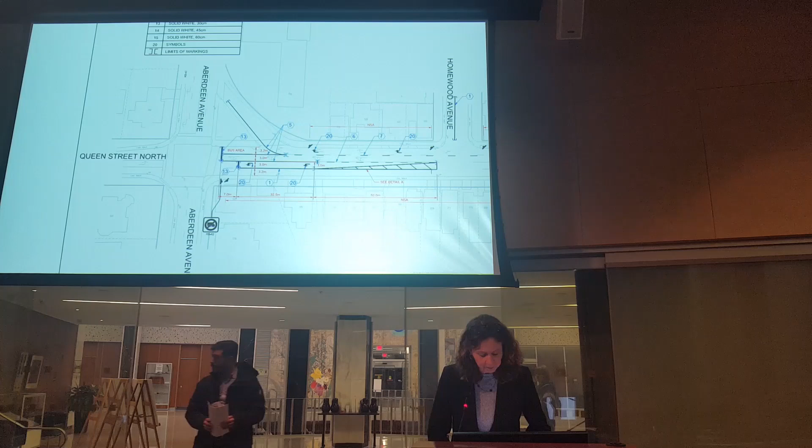Who are here. I'd like to go through an agenda or a roadmap. That roadmap will be me, first of all, introducing who is here tonight that will be assisting in support of this meeting. I'd like to give you a brief chronology of this project. We will speak also about the motion that council supported. So what are the parameters that staff have been given to work with, the work that they're charged with doing, and the budget within which they must do that.

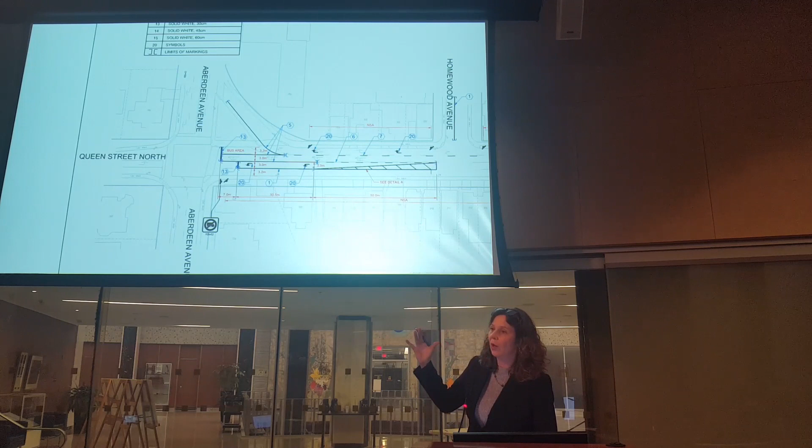I will underscore for you that this is a conversion project. It's not a reconstruction project. After that, staff are going to review the principles that guided this conversion project, and then we're going to go through it almost intersection by intersection. Personally speaking, it's a little bit challenging for me to understand a lot of these details, but what I do find very helpful is when I hear the comments of my neighbors who may know their intersection better than I do, and I can learn from that, and I hope we can learn together as we move forward into the evening.

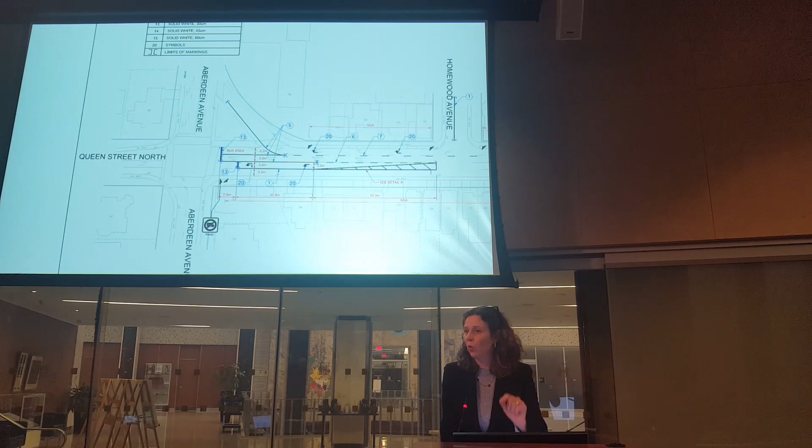When it comes time for you to give your feedback or to ask your question, I will be asking you to come to the mic, which is up there. That's where I will be seated after I give my remarks. Staff will be down here. The reason I'm asking you to come to the mic is so that everybody else can hear your question. We are recording this. You won't be on tape, but you're

from one-way to two-way traffic operations based on the report prepared by AECOM, to be funded for just over $1 million from the Red Light Camera Reserve. So they approved that conversion between Aberdeen and Main, and that staff from Public Works work with the LRT office with the objective of including the King to Main block in that conversion from one-way to two-way, and discuss it within the context of LRT moving forward. So that's what's on the table for us tonight.

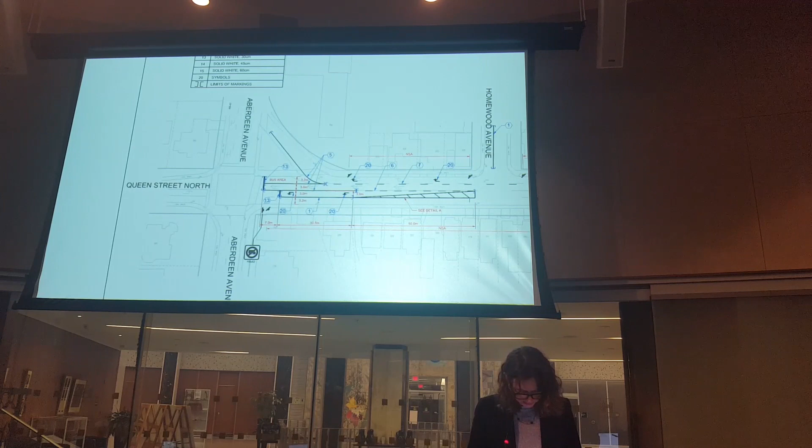What I'd like to do is hand it over to who is going to be the lead walking us through. This is Rob. He's going to be walking us through it. Is everybody okay with the agenda? Was that your expectation coming forward tonight? I have one question. Is it the time to ask? Sure. So my query is, why is this only to Main and not to King? I understand it's something with LRT.

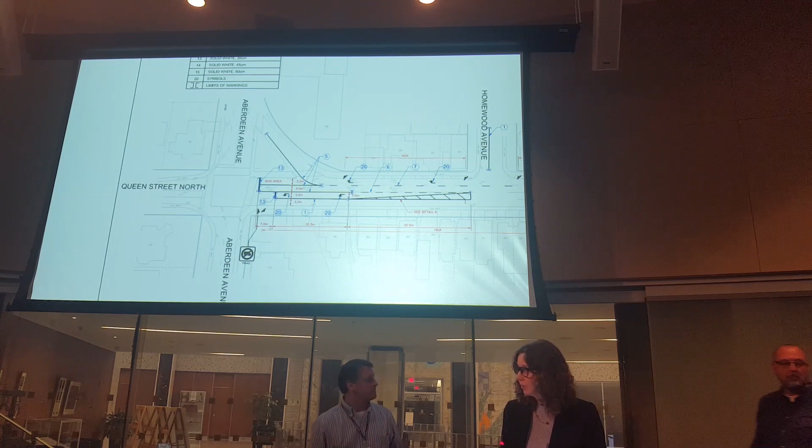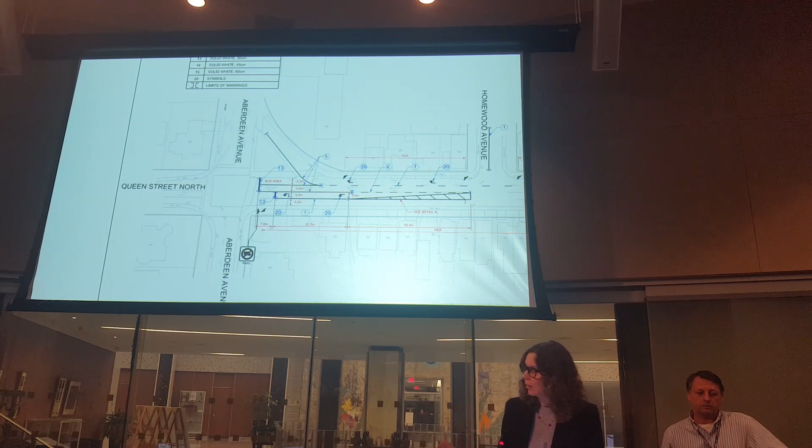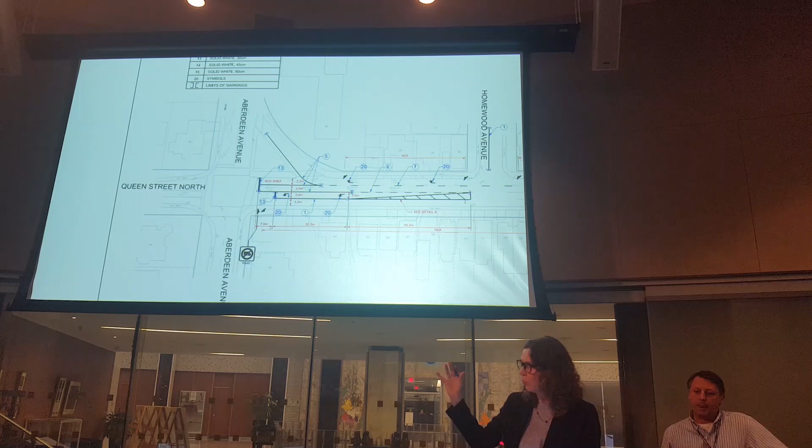Yep. My comment about that is a huge percentage of the traffic that turns left on Aberdeen is going to be taken away if you go to King. Very little will be taken away if you go to Main, unless it's two-way Main. That's a very good question. They're all good questions. In June, when council received the engineering report from AECOM and the feasibility, they had a number of options before them. One of them was, do we wait to do the conversion until LRT is complete? Or do we go up as far as Main, then have a greater sense of certainty with what's going on with LRT, and then move beyond that? Does that answer your question? So that's the decision that council made.

Okay, without taking too much time, my next question would be, is there a plan to make Main Street two-way? That's not on the agenda tonight. Is that right? Because I can't see it. Okay. Thanks. You're welcome.

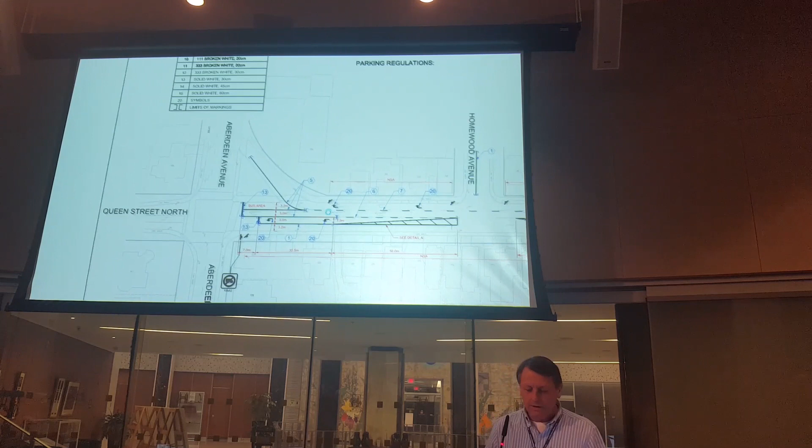What we have displayed up on the screen is what we call our pavement marking and signing plan. There's some information on this document, like these hexagon shapes. That's just a guide to indicate what type of line marking that is, so you don't really need to concern yourself about it. This design is probably about 90% complete, but it's certainly not a finished design. This is starting at Aberdeen and Queen, and north is to the right on the screen. What's shown here is basically what's already in place at Aberdeen and Queen. It shows a longer left turn lane distance here, but that may change.

So just slide it over. You'll see here up at Stanley, the design shows the center median where we have those knockdown sticks today. That'll be to enhance the no turns into that street. All along Queen Street, when we cross the side street, we're showing crosswalks with ladder bar markings all along. And some of the pavement marking design here will be modified slightly.

Okay, move over. So next up is Herkimer. Herkimer is the intersection which currently has three pedestrian crosswalks. There's an island out there. You want to highlight where that island is, Mike? So there's an island. It'll obviously have to be made smaller because we need to get a northbound lane through that area. So we've shown here in general where we think pedestrians will cross.

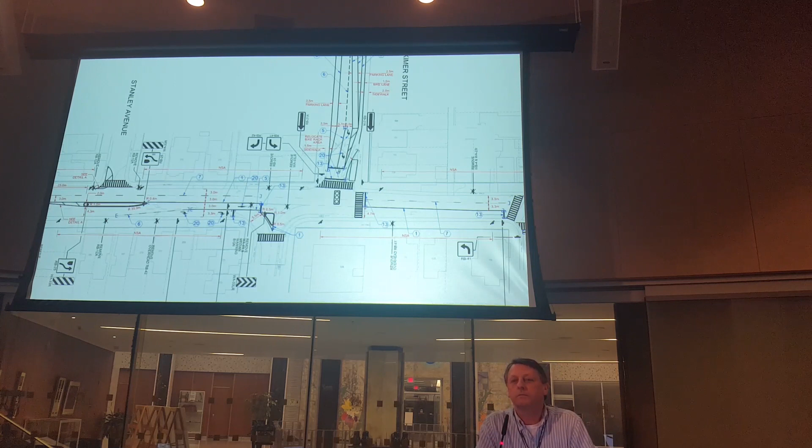I think what we'll do is we'll allow these questions for the people who are making their way up. It's also feedback, it doesn't have to be a question. I'm wondering though, if after these gentlemen speak, we'll let Rod go through everything. We'll hold our comments, and then if we want to go back to something, let's do that.

Just in your deliberations about how to handle that intersection, did you include the option of having all 4 pedestrian crossings operate at the same time?

No, we haven't considered that. That's what you call a pedestrian scramble phase, and inherently there's a problem with those. Because you can allow pedestrians to cross all at the same time, but when the green comes on for the vehicles, will you allow pedestrians to cross with the vehicles?

So, just for everybody in the room, comments like that, we will take those comments back, we'll evaluate it and determine what happens from a level of service standpoint and from a safety standpoint, and then we'll discuss that with the councillor to let her know what our findings are. So throughout this entire design, we did meet with some people earlier today, and they had similar type comments that we've taken and we're going to take back and review. So if you do have comments like that, please do bring them forward so that we can evaluate them.

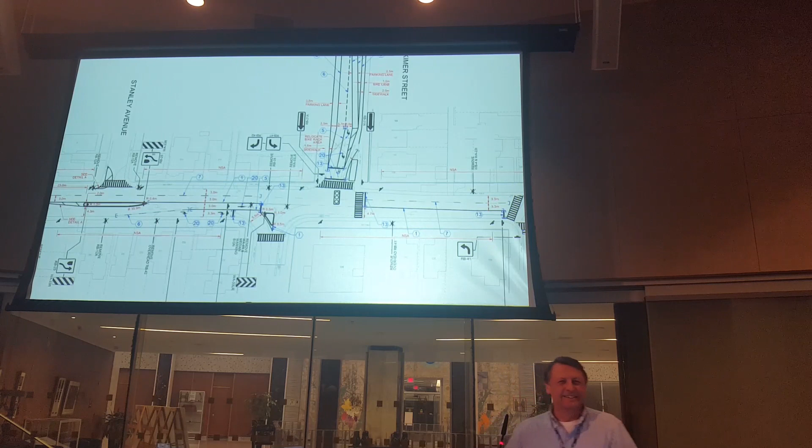I think we're going to allow one more question at this point. I have to attend another meeting soon, so I would like to ask a general question. What is the purpose of this change in traffic direction? Is it just to accommodate the LRT? I can answer that question. Speaking of the mic, thank you. The purpose of the conversion was when the work began in 2012, 2013. The community wanted a conversion as one way in which to bring some measure of control over the traffic, so slowing down the traffic. Because when you have two antagonistic forces going at you, it's one way in which.

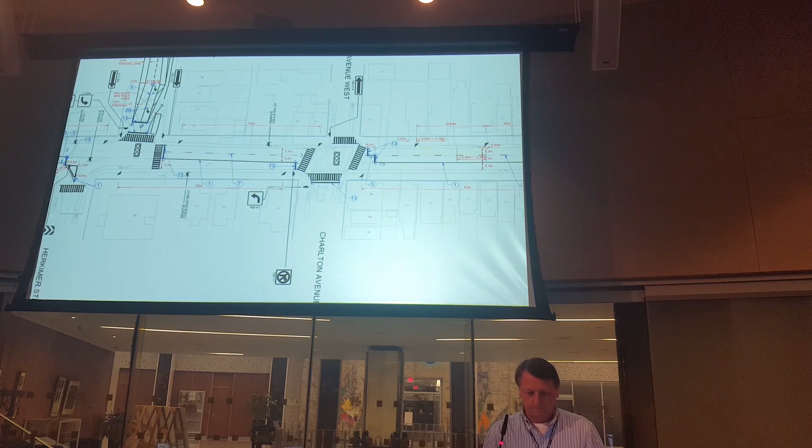Okay, so we'll move down. Next intersection up is Charlton. Really not too much change there. We saw some of the crosswalks being redesigned a bit to suit a little better design. And we've had some comments earlier today that will mean some more potential changes here. But going up again at Robinson, not much change. The same on both sides.

One thing to note here in yellow, does that show up in yellow? We're just showing the potential parking opportunities on Queen Street, because with us going to a one-way northbound lane, we're going to have to remove all the parking on the east side of Queen Street. We estimate there's about 51 parking opportunities on the east side of Queen Street. When we go to the west side, we're not going to be able to provide quite that many spaces. When you look at this particular block, you can see it's a long block with no driveways, whereas on the other side of the road, there's several houses. We can't block the driveways, so we end up losing spaces. So we estimate about 36 spaces can be provided on Queen Street between basically Charlton and Main Street.

Duke, which is where we have the intersection pedestrian signal or half signal, will become a fully signalized intersection, like the other intersections along Queen. We get up to Bold, not much changes here. Same at Hunter. It'll obviously have a northbound lane. The one thing we have identified is this right turn movement here, because of this really tight radius in the corner, and there's a big hydro pole right in the corner there. We're going to prohibit right turns there, because they just won't be able to get around that corner without encroaching into the other lanes or riding up over the curb. Then there's Canada Street, Jackson. Again, there's not much change there. And obviously, right now, because it's ending at Main.

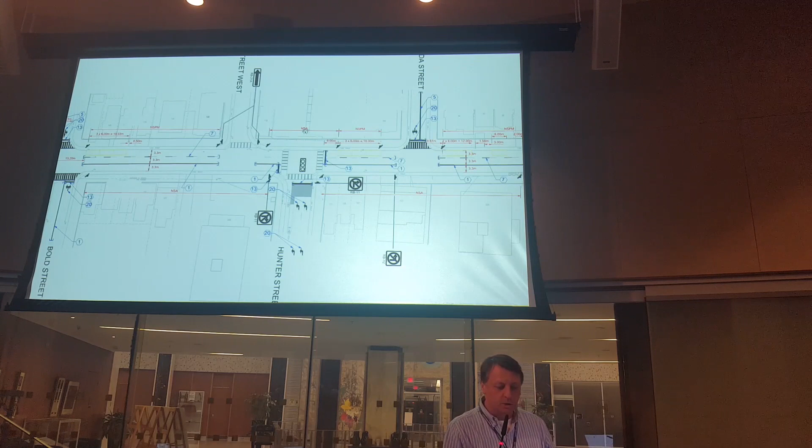Whether it's one way or two way, what are you going to do to address that issue? Like I said, our scope of work was purely more of a pavement marking and signing issue. But I know the bump you're talking about, I think it's really the top of the railway tunnel. Yes, it is. And they've worked on it a number of times and we have the same issue. Yeah, that would be something we'd have to maybe refer to another group to take a look at. But if you go to two ways, you're gonna have that many more cars exposed to that. Yeah, and the cars coming from different directions. I don't know what that's gonna be.

I just have a question in regards to the last question I had. You said it being one way now makes it dangerous. Do you know how many accidents have been on that stretch of the road in the last year or last 5 years? On this particular stretch by Hunter, the whole stretch? The whole stretch, I couldn't tell you. We have that information, I just don't have it with me today.

Well, I think that's an important issue because I don't know off the top of my head. $1 million. I don't know if it's in the study or not, the reports. I don't think so. We'll take a note. I mean, is there that much money in the city that would waste $1 million to change literally a few blocks if there are no accidents?

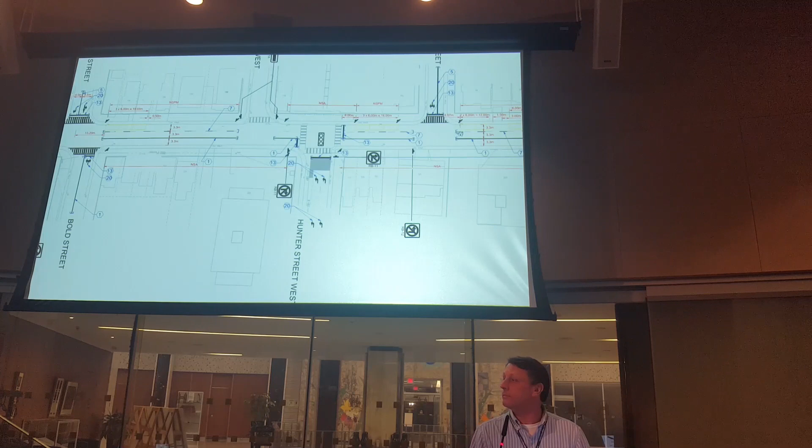Okay, we're talking about tonight, the parameters that are on the table and the direction that's been given by council and the money that has been assigned to this, is that there is a conversion forthcoming. So just to finish off, here at Main Street, the curb lane coming northbound is going to become a right turn only lane onto Main, and the opposing lane coming down Queen from King will become a left turn only lane onto Main. It doesn't show in this drawing, but we're considering prohibiting right turns on red here. And we're going to have ladder bars in the last two crossings here. That's basically what we designed. As you see, we haven't shown any design work up to King here.

The other thing to point out is we plan to allow parking on the west side of Queen all day except 4 to 6 p.m. Monday to Friday, which is when we're going to need a little more capacity for the southbound traffic. Outside of those periods, you can park there.

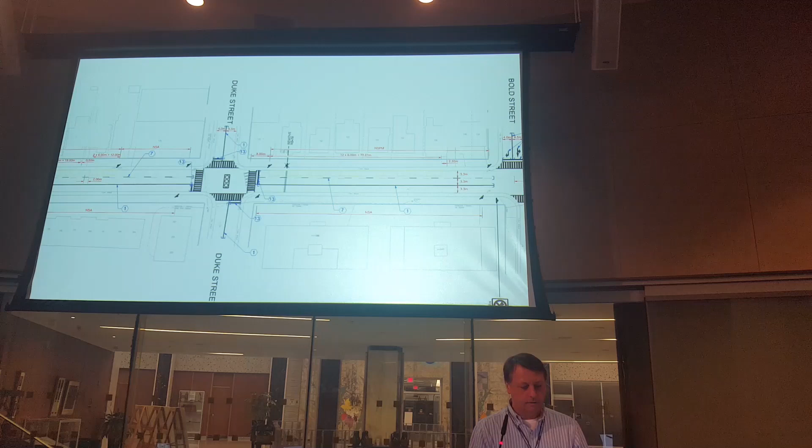Did you highlight the island at Stanley? Yeah, we put it in. That'll be a raised concrete island to replace the bollards. So there is a restriction on Stanley at present. That restriction is going to remain and it's going to become a permanent concrete one. Is that what you're saying, Rob? Right, we show the sign being removed, but we may leave the sign in there, but the island would certainly prohibit that movement, or make it much more difficult. That will become a permanent feature. No left turns on Stanley.

Thank you so much. That is a lot to digest, and the features are quite detailed. But again, we can often learn from the comments and feedback from our neighbors. So if anyone has feedback to offer and questions, now is your opportunity, and I will be listening and taking good notes.

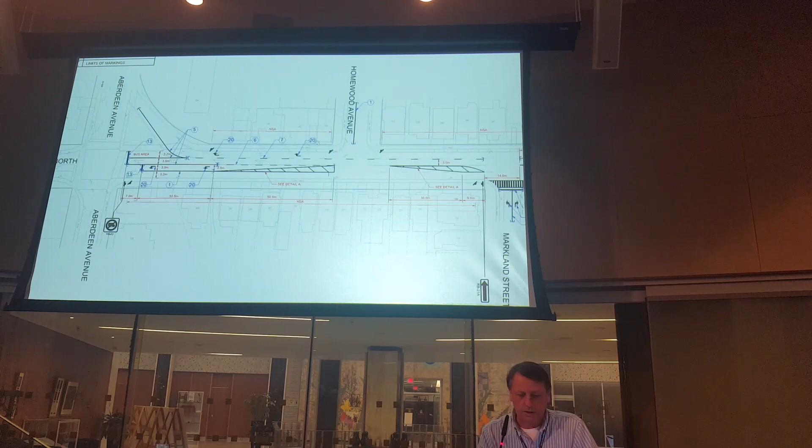Take me back to Homewood. So a person who lives on Homewood and wants to head east, how are they going to cross Queen Street? I'm not a traffic expert, but I would think a pedestrian would want to take the shortest route to get to their destination. So if I live on Homewood, how am I going to go east? You're talking as a pedestrian? Yes. How am I going to head east to James Street? The way we would look at it is either you go down to Aberdeen or you have to go to here to cross.

Versus now they go here to cross, or they go down to Aberdeen to cross. It just seems to me that the distance is so far from Homewood that a person would have to go to Herkimer when they can go through Markland. There's going to be a lot of jaywalking, and at nighttime there's going to be a higher incidence of people being hit.

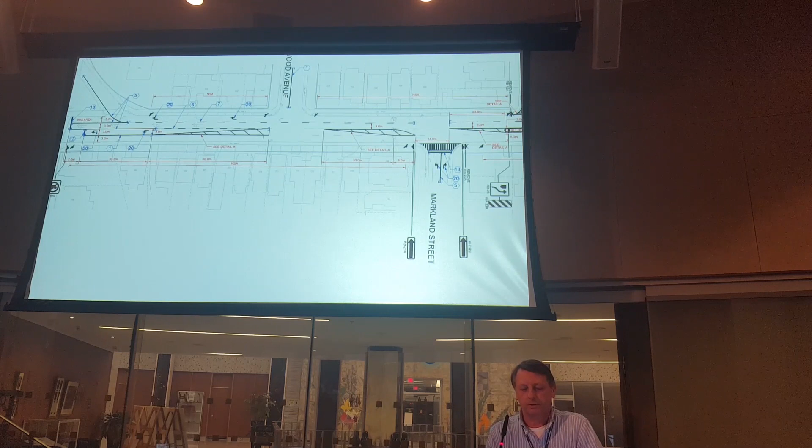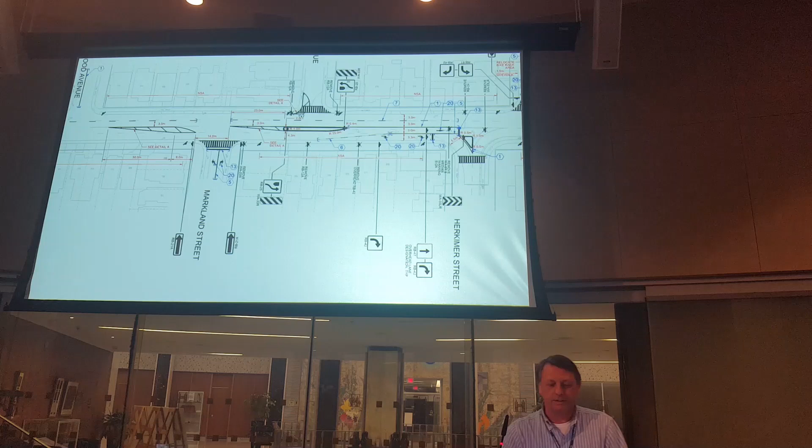Well, we can take a look at that. One of the issues we always deal with is when you start putting devices too close together on the roadway, it starts to be difficult. The drivers get distracted. There might be someone crossing here, but they're looking at the signal displays up here. Generally speaking, we like to keep about 200 meters between devices. I know that's not possible here and still have a lot of spacing, but we can look at it.

But that's our concerns. And the parking in that area for Homewood, Aberdeen, there is currently some parking on the east side of Queen Street. So when you put up that barrier, are you taking away all the parking? Yeah, that is one change that will happen. How much parking is there, right? I think right now it's all gone, isn't it?

No, I think there's some. Is it between Aberdeen and Markland? I think it's somewhere around here, right? Yes, they park all along there at night. And it ends before Markland. At most it was like 4 spots, I think. There's a sign there, but it doesn't say what the sign is about. So those people are going to park on Homewood, which is already over congested.

Well, what we're trying to do is, if traffic is in this lane, that they stay in this lane, that they don't veer back to this lane. Because one problem you will have, let's say you allow parking here, but there's nobody parked there. So the first guy in line follows this path, and then he tries cutting back in, and some guy comes up beside him because he sees there's no cars parked, and they can sideswipe.

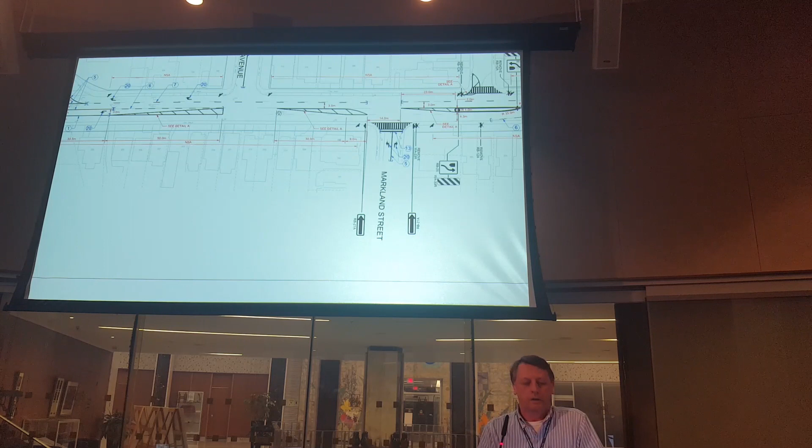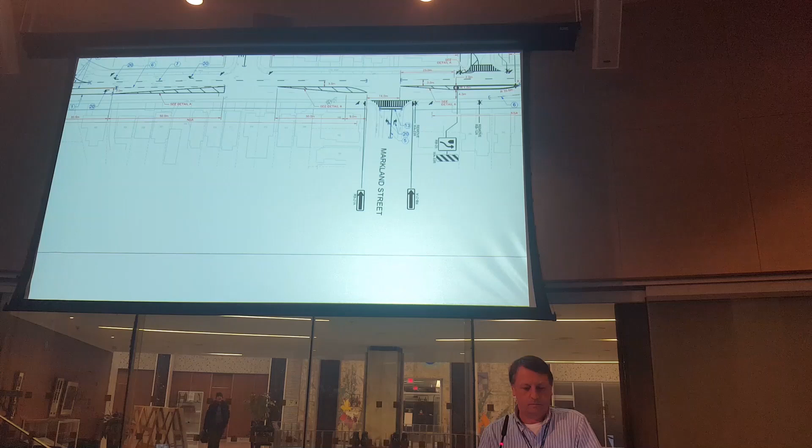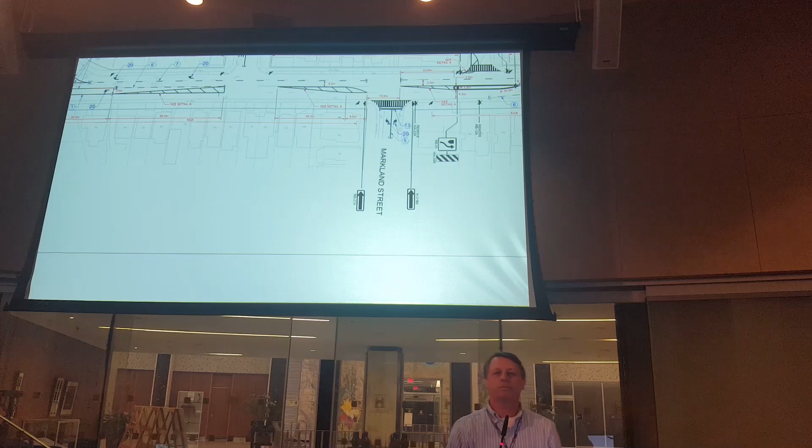But like I said, the cars come through, they're gonna swing out, and then swing back in. And if there's no cars parked in the curb lane, you may have people deciding to pass the guy in front of them, and you end up creating a pinch point on the far side. But you created that problem by putting those bars there. If they didn't exist, the cars would stay in the left lane. One of the requirements of what we're doing was to put this island in. So there's not enough room here for 2 lanes, so at some point we have to close this lane off.

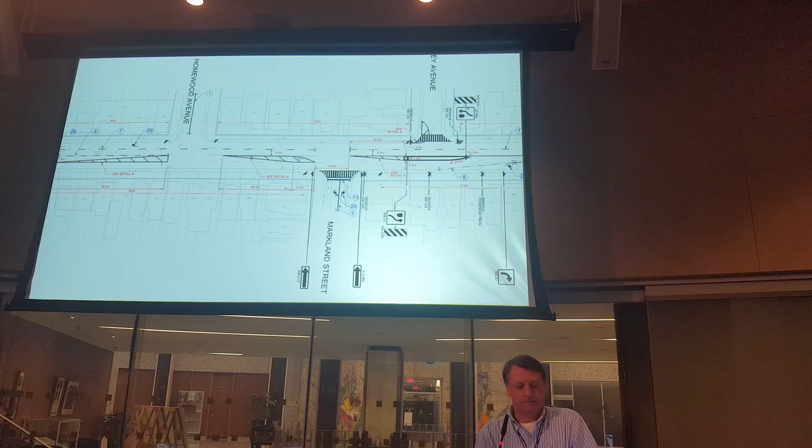Do you want me to bring this up? Oh, no, I understand what you're saying. Yes, you take this out, put the barrier on the right side so the cars stay all the way straight to the left until they get to Herkimer and just turn in. You could have one straight line and you don't have any of those barriers, and still let us park on the right side.

Let us take a look at it. Your concern is that if they don't park here, they're gonna park over here. Yeah. We can take a look. Some thoughts just crossed my mind as we're sitting here, so let us take a look at it. I think we might be able to do something there, I got an idea here.

But my concern is that there are a lot of apartments there, and the one apartment on the corner of, I think, Duke and Queen, has a lot of visitors from the fire department, the police department, a lot of flashing lights going on, and it comes into my place.

I'm concerned, or maybe I just don't understand, what's going to happen in that lane in front of those apartment buildings. Presently, in the evenings, a lot of things seem to go on, people's health, they're ill or whatever, and it's an abnormal amount of vehicles for fire department and ambulances from my perspective. Is that lane going to stay there for parking? Or what's happening there? I didn't look at it.

Typically, we restrict parking near a traffic signal, but we have flexibility as to how far we restrict it back. We just don't want cars parked so close that they obscure the vision of pedestrians at the intersection. And as far as the light changing, when we signalize this completely, it'll operate much like it does today. It's going to be a push button across the road. It's 3 lanes, they probably get about 20 seconds. But the southbound display will be on the other side of the intersection.

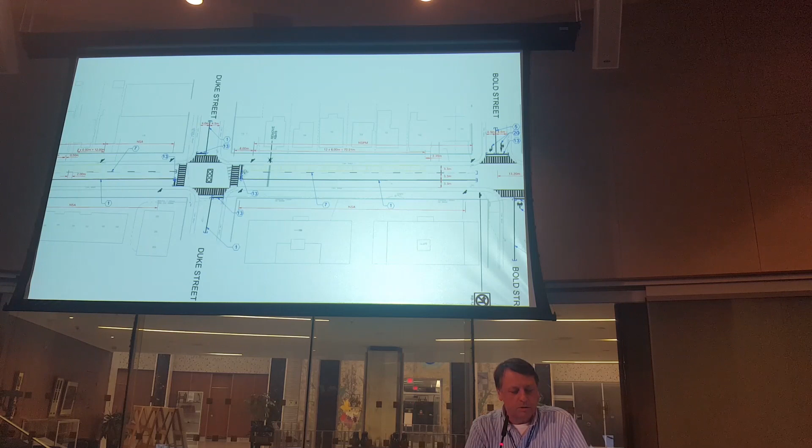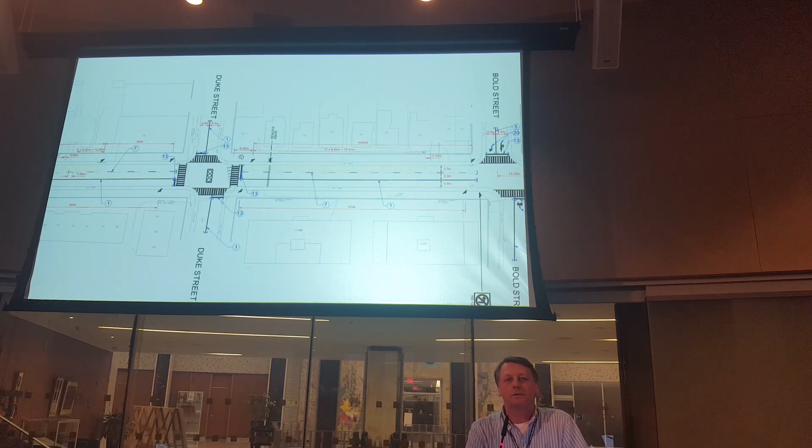Actually, just in general, if you drive around the city, most of our traffic signals are one-way streets, they cycle all the time. You don't need a button to cross. But this is now going to 2-way, and it's not normal that we cycle like that on a 2-way street without demand.

You've taken away our ability to turn right on Queen, jog onto Stanley, even though our entire lives, school, church, karate, everything's on Locke or Dundurn. So you forced us onto Aberdeen, but can you please picture coming out of Markland and turning left onto Queen? Just envision that. You're creeping to the end, you've got your left signal, you can't see because there's trees, there's cars, there's snow, and there's signs. And now everybody rocketing down the mountain at 60 or 70 kilometers an hour heading north is suddenly swooping into the lane that you're edging out into to see.

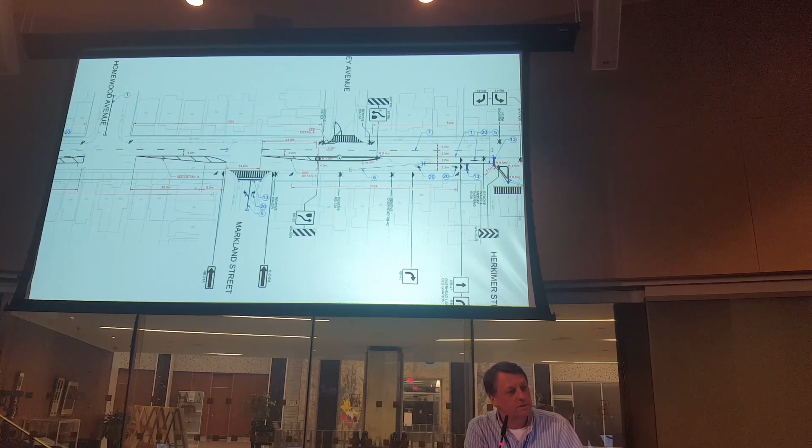I think Dave's got some comment. So with this design, one of the things it does is if you're turning left off of Markland, now you only have essentially one lane of traffic to identify. So you're watching traffic coming down from Aberdeen, you're going to pay attention to the traffic in the curb lane. Which you can't really see until your nose is out, based on the trees and the design of the street. Okay, so the trees, that's something we can look at. Is there something we can do with that? The speed of the cars is another issue.

So, if I can just finish, once you've identified that you have a safe gap to make your move, because of this design, you almost have, we'll call it, a no man's land there. And you're able to sit out and now focus on traffic coming southbound on Queen Street to make sure you have that safe gap to enter the roadway. Whereas now, I know what you're saying, you have to navigate both directions, trying to find that safe gap. So this design will help you with that.

I mean, don't get me wrong, we appreciate the work being done. The crossing, we've been there for 4 years. I've lived in Toronto, Montreal, Boston, Vancouver. I think, Cameron, what do you think on average, the number of cars that goes through the pedestrian crossing?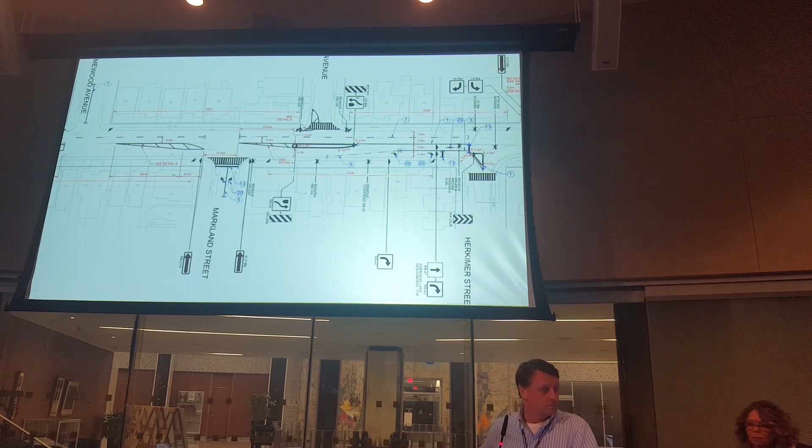Well, but if I could just jump in here. This is the intricacies of city building. Because you've remarked there are children on Markland Street. There's also children on Stanley Street. And the reason that protection was put up is it was deemed to be a safety hazard. So the cars coming the wrong way. I think, yes, that's right.

And I think what Mr. Ferguson was suggesting maybe is looking at Markland. Again, our scope is Queen, but looking at Markland and maybe considering an opportunity to add a bump out, which would prohibit or make it more difficult for cars to think they can opt for Markland. So we've heard your concern, and Ms. Jones

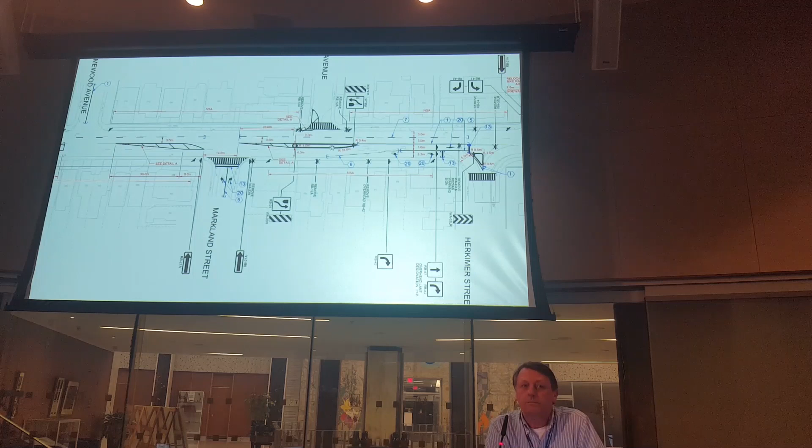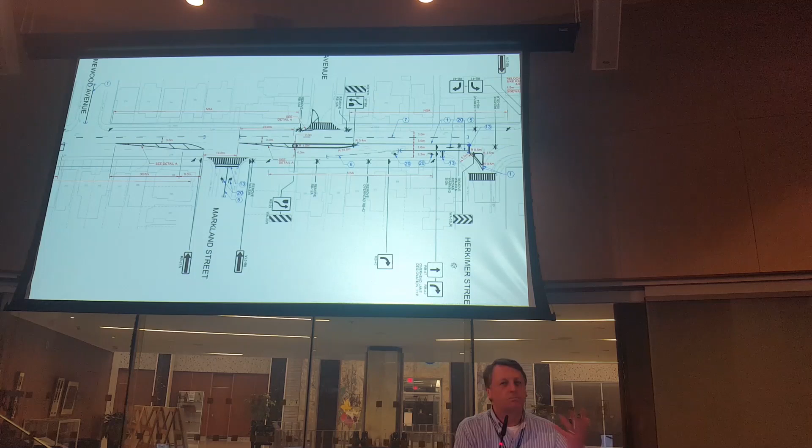One comment I can make about the island going in, with that island being placed there, that's gonna narrow the roadway. It gives the appearance of a narrow roadway for drivers. So it should have some effect on reducing people's speeds there. They're gonna have a curb right next to the road. Generally, if you drive through anything where it looks like it's narrow, you're gonna slow down. So that will have some effect in reducing maybe the speeds coming through that area, because that island will be there. Whereas now it's just sticks. I don't know if you can see it. So, but yeah.

Hello. Thank you very much for allowing me to actually say something. First time in an event such as this, so bear with me, please.

So as I understand, the pedestrian crossover now will not be there? That's right. Okay, and as far as, we can't look at Queen Street in a bubble, we also have to look at the tributaries on and off it, which people have raised here. For Bold Street, I see you have two lanes coming onto Queen Street from the west side.

Realistically, I'm not sure they'll fit. Obviously, you've done the measurements, but I'm just thinking of the parking that's already there that we're pretty close to the Bold. You're talking about either putting in no parking; I'd rather no parking and no stopping. That could be confusing to some drivers, since it'll be a stop. Yeah, some of these side street markings, it's shown like this, but it's designed on 100%.

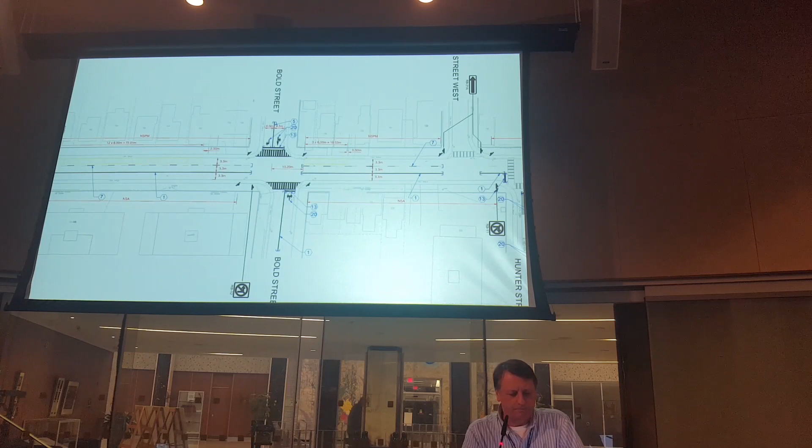I don't think you have markings like this today, do you? No. It's just a stop bar probably, and just no lanes, if it's even there. Yeah. We may just leave it that way. I mean, for a lot of these little side streets, I don't know if you really need to designate the lane so much like that.

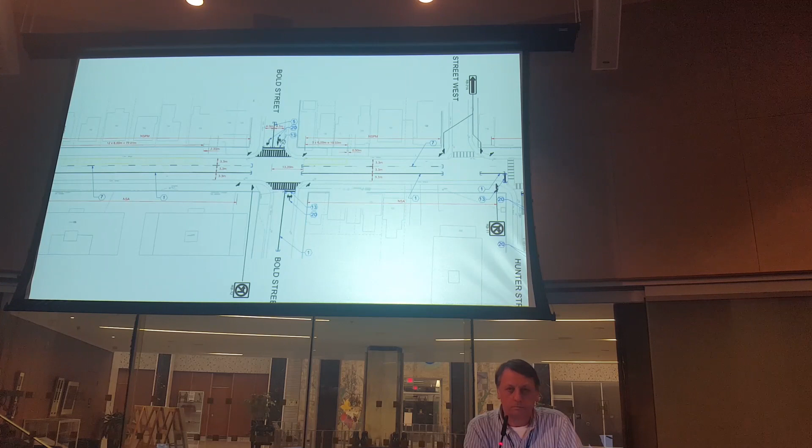Yeah, I'm just thinking, especially if you go that type of route where you're looking at people turning both ways simultaneously. Unfortunately, the streets aren't necessarily designed even for some of the two-way traffic that we have. That's a whole other issue, but now putting that in might make it a little more. Yeah, we would take a look at that, but I don't see that being a critical component of this.

So, currently there isn't any parking on the west side of Queen Street, and we mentioned it, but you kind of addressed that too. Correct. So I thought you would mention something about removing some of those spots. Yeah, because we're going to convert the east side curb lane over here to northbound, we can't allow parking there. So the residents who are going to lose some of this parking asked us to look at whether we could provide some parking at least on the west side to make up for what they're losing on the east side.

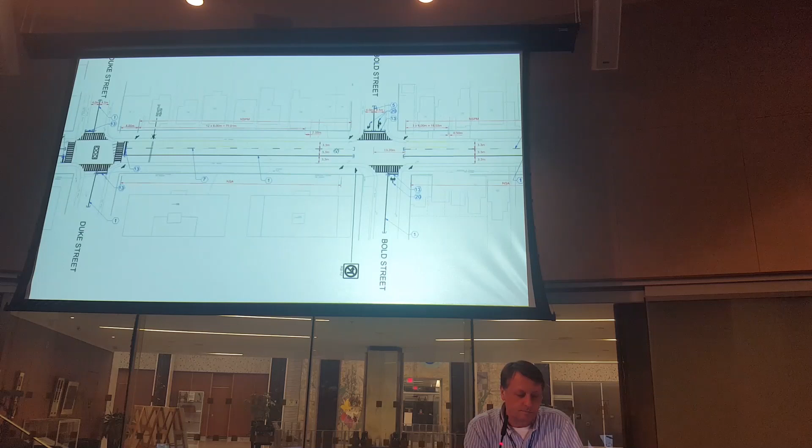And just to reiterate what some of the other people have said, it is a main route, especially for ambulances going to St. Joe's. I would just hate for it to be problematic for them in how this works. So hopefully, I'm sure you're accounting for that. Someone's already addressed turning on Stanley, so I won't talk about that then.

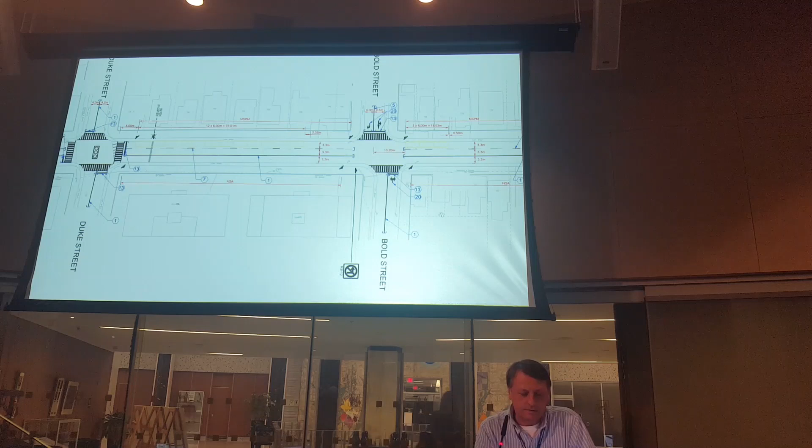So the light for east-west traffic, do you envision it being similar to what it is today? There's a stop sign there presently. Yeah, the stop sign today would be a regular traffic signal. But you were saying that the traffic signal was going to be pedestrian activated? And vehicle activated, so if there's a car waiting, it triggers a light. But it's not going to be any longer duration than what it is today, because there really isn't that much traffic going across.

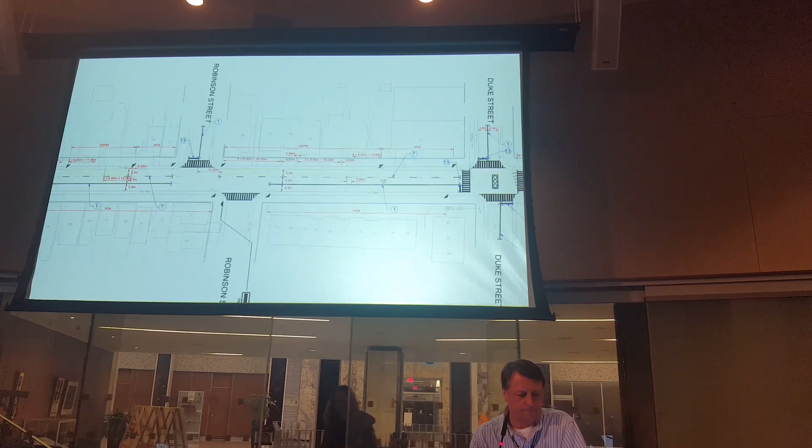And sorry to bring it back. We want to go north? Yeah. So I'm trying to understand, you said you would make the little median there where it turns at Herkimer. The median that's in there now for allowing people to turn right, to stop them basically from continuing northbound. You said you just want to make it smaller. Why is that? We've been asked about how this signal is going to be phased, and one reason is we're concerned if we remove the median. If you drive this on a regular basis, you'll know once you turn and get over to Hess, you need to get into the other lane to go straight through because it turns into a left turn only lane at Hess.

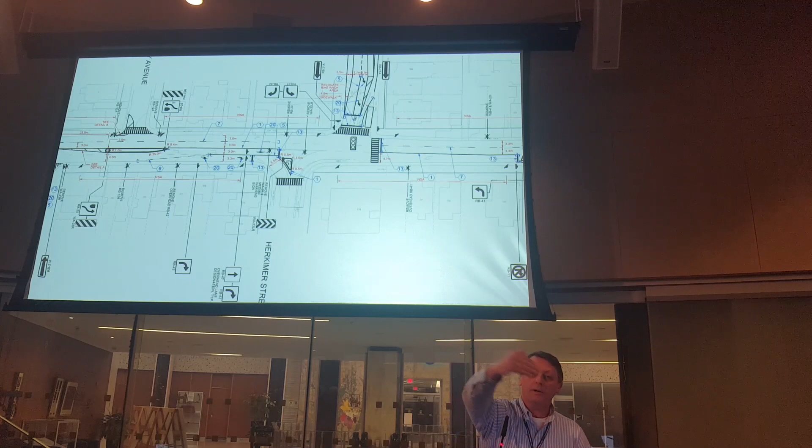So the expectation is anybody coming south on Queen is ideally going to want to get into this curb lane. They're going to turn here and then swing over to Hess. This island would provide a splitter between the heavy northbound rights and the southbound lefts. Because we feel if the island's not there, people are going to make a wide right turn, and they'll conflict with those right turns coming north. So it's encouraging people not to make a wide turn, that they have to turn into their lane as per the Highway Traffic Act, and then switch over.

And then the reason for the island there, we want to put a signal pole on it. And so that'd be the regular traffic signal you're talking about, or would that be something separate? The way we're looking at phasing this is that these pedestrians crossing, they'll probably cross more up here. Yeah. That crosswalk could be put up here.

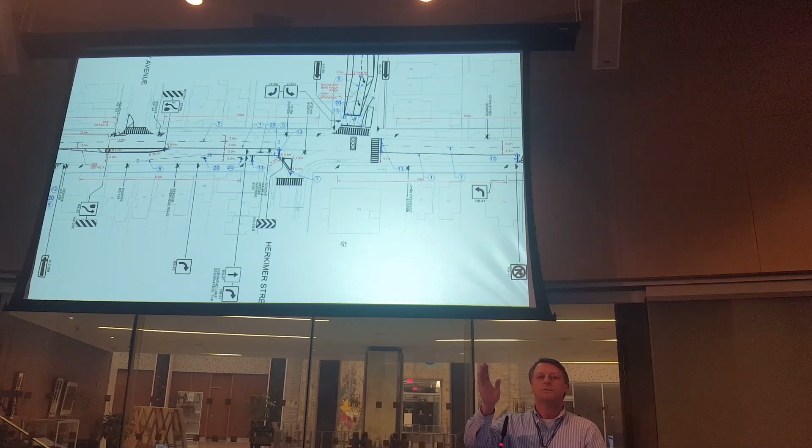But based on comments we've received so far, we're probably going to phase it so that the right turns and pedestrians do not move at the same time. So it'll be a signal that says right turn signal. So it'd be red when the pedestrians cross here, and the green arrow will come up for the right turn. So we completely separate it, so you're not getting rights crossing when pedestrians are going.

By having that island there, it's a great place for us to put a pole to put the signal head display right in front of the driver. So it serves a couple purposes. If you were to remove that, that might reduce a lot of the issues that other people were talking about, and you were just talking about people now trying to get in one lane, moving around. The other thing it would do, it would enhance the fact that if you're in the curb lane, you have to turn right. If we move it, someone just might decide he wants to go straight through.

Of course, but you can't account for stupidity, right? Yeah, we try our best, but we can't.

And I guess just as one final comment, it just seems to be a growing sense within the city, and not just with Queen Street and other issues that I'm not necessarily going to go into, but there's a lot of things that are happening or seem to have happened that appear not to be a part of a larger plan. Like for instance, those sticks and then making them into permanent outcroppings, then turning the street into a two-way street. So now you have two cars that can't go simultaneously through. Things like that. So it doesn't seem to be planned. So I'm hoping this is all part of some master plan.

Yes? You want to comment, Dave? I would say that it was identified in our transportation master plan. So that's sort of what we worked off and then the direction of the council. Okay. As I said, it seems they make changes and then, probably in 5 years, have to change again, especially with the LRT coming in. And a lot of times too, with these knockdown sticks, that's something we can install quickly for relatively low cost to affect the change we want. And then we can budget and schedule for the actual physical curb construction later on. So long as that fits into the larger picture.

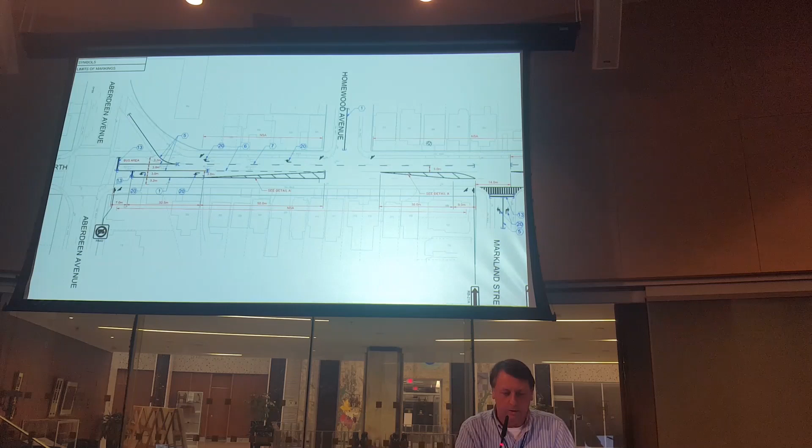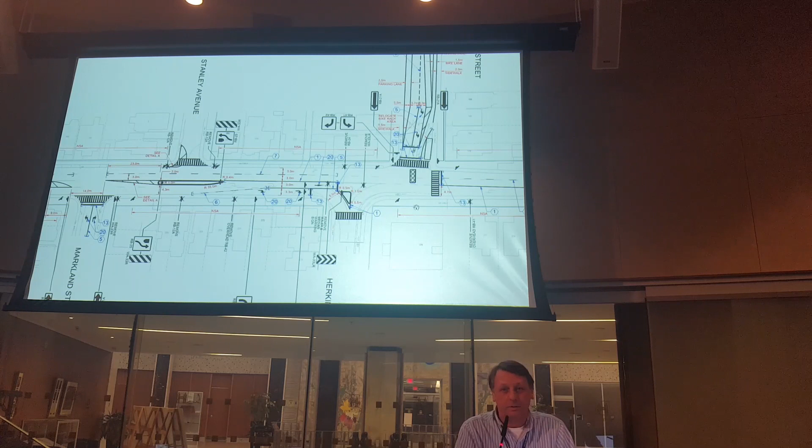Right now, the timing is really dependent on when we finalize our designs. We can't go to contract or go to tender until we've got our designs finalized. Right now, they're not finalized. Once we do finalize them, we're probably talking at least a 3 or 4 month period just to go through the tender process, award, get work started. So we're talking July or August at the earliest that this would happen, depending on how quickly we get a resolution on what we actually want done.

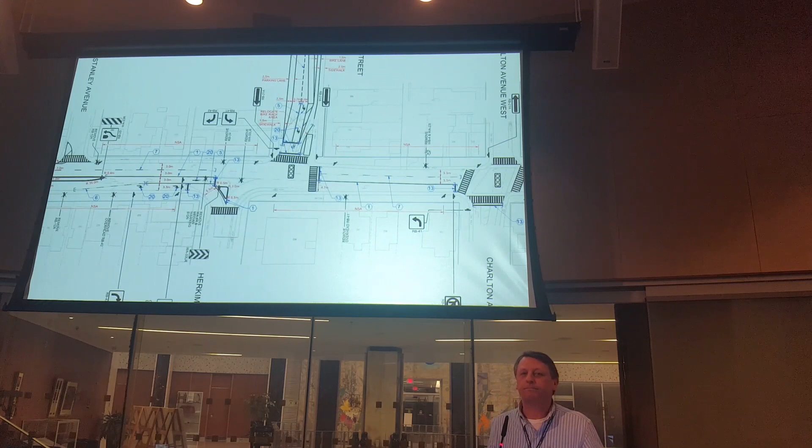And as far as the construction work goes, it's gonna be a little more localized, whereas Locke is gonna be some major works. No, I was just thinking we're going to be impacted seriously on Locke, commencing April. So this is going to overlap. So really, all the volume is going to Aberdeen, and then this is gonna take a huge load off of Hess and Bay Street going down.

But the left-hand turns, we don't have Stanley, we don't have Homewood, we have Charlton, Robinson Street, that just dead ends into the park. So Hunter Street. And I believe Jackson.

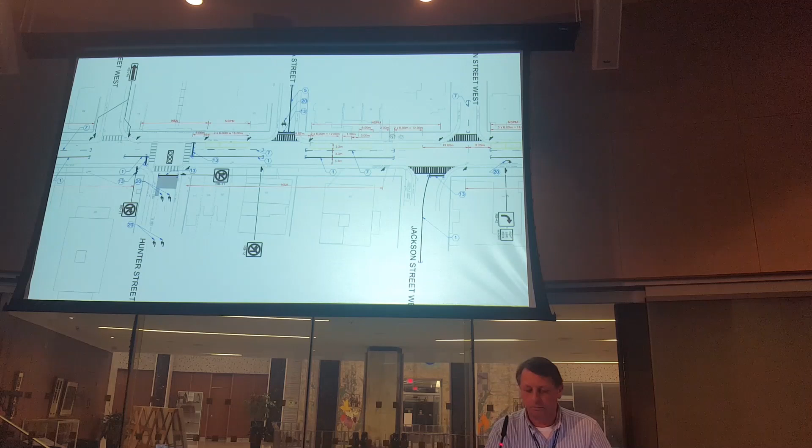With Main Street, basically everything goes to Main, has to go right up. And the plan is just to go to King after the decision's made. Okay. Is the parking, one last thing, is the parking going to be limited, like no parking 4 to 6? Yes. Okay. So it says here, no stopping PM, no stopping 4 to 6. Okay. Otherwise, you park there. During the afternoon rush hour, you need to pass.

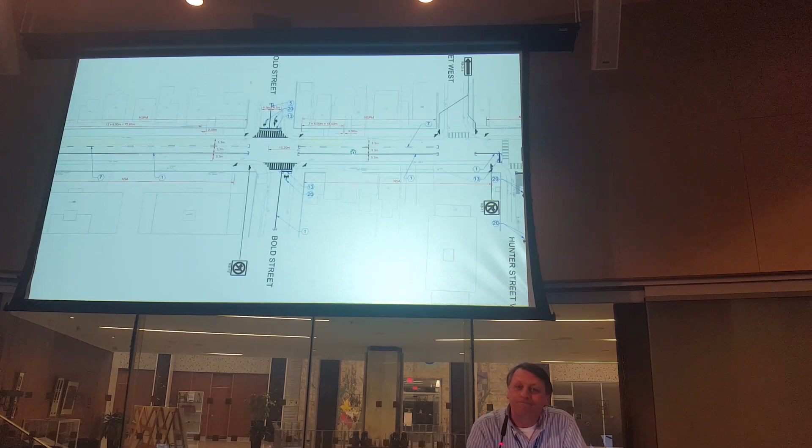Is there any input on, do we expect more volume on downbound, upbound? We're not expecting any more going up the mountain, coming in the southbound direction of Queen. It's a little bit of a guess how much traffic is going to go northbound. Our consultant has done some projections, but it really depends on how convenient people find it.

See, with the increase on northbound, living where I am, if I'm coming up from downtown to make a left into my driveway, people are kind enough to let us stop and let us go, but we have to wait and look. That inside lane is going to become more busy. So now we have a double cross. We have to cross twice. And there's been an enormous amount of accidents. I've got people who are launching their cars onto our sidewalks up there.

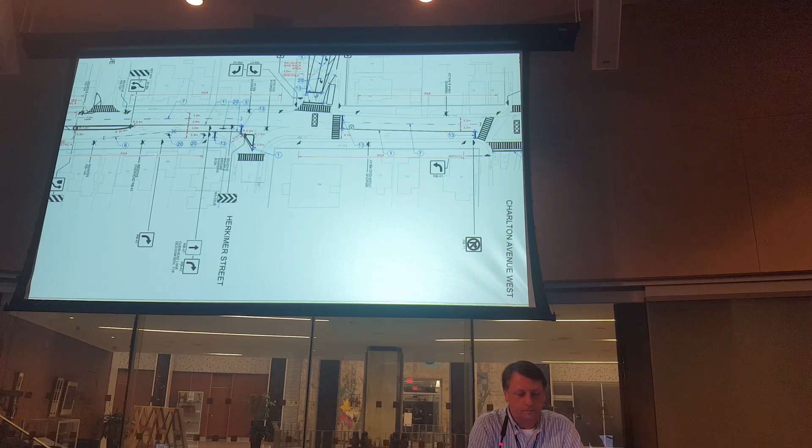And I know that's a separate issue, but I would like to think that we need to speak to the police department to slow this area down. Let it flow, but you've got the machine up there analyzing the speeds. Not on rush hour, there's no speeding. Off hours, it's unbelievable how fast people are going up and down, and the danger of cutting your grass, shoveling your snow is enormous. So that's all I wanted to say. Thank you.

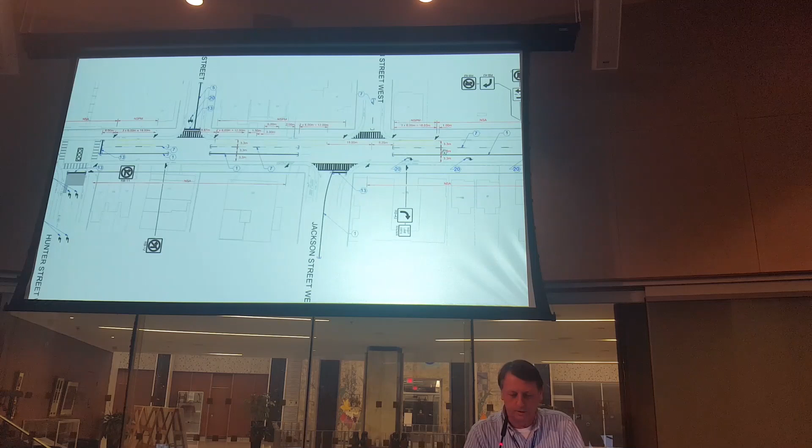Okay, so I actually live away up at Main, and no one seemed to be talking about up there. The big question I have is that parking between Jackson and Main. On the design there, I think you have what? Yeah, we showed some parking there, like I said, that's proposed. We got 1, 2, 3. Farther, next block. Oh, sorry. Yeah, that. Because of that right-hand turn lane off of Main onto Queen, people go in that lane and then all of a sudden they're going to have no lane.

And especially for people who need to go down Jackson, I don't know whether those 2 parking spots are justified based on the amount of traffic problems it is going to be, especially if people are turning right on red off of Main onto Queen. Right now you can't really go through on the right-hand curb lane because there's usually buses. Oh yeah. Yeah, like I said, we've shown where we think we can fit parking spaces in. It's not finalized. You raised the point there.

The other concern I have would be, is Jackson 2-way here? One way west of Queen, 2-way east. That's what I was looking at. There's no stop bar, so we'd be concerned about sight lines if cars are parked that close, but since nobody's pulling out of Jackson. Honestly, the sight lines are much improved. Like because I usually come down

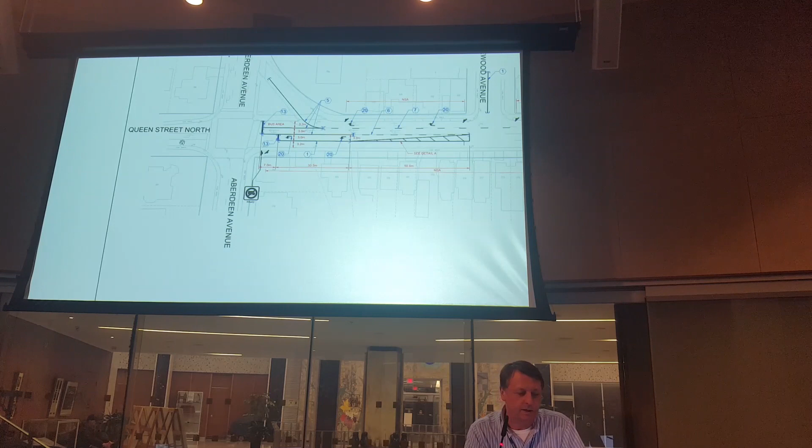They all turn to go down the 403. So why are you running through the city as opposed to on the highway? But I do know that Aberdeen and Queen in the morning, not in the afternoons, is the longest advanced green in all of Hamilton. Really? It's 30 to 35 seconds long. I worked in Toronto for 25 years. We may get one intersection on a main street that long. It is very, very long. It's not that long in the afternoon because the volumes aren't quite as heavy. The problem we got in the afternoon is you got a heavy flow coming up the mountain. In the morning, it's not so heavy.

Has it been considered to make both lanes on Queen northbound left-hand turn lanes, so we have 2 lanes on Aberdeen to turn into? We've looked at that. What we'd have to do, we'd have to split the phasing, like it used to be over at Aberdeen and Dundurn. Right. One direction first and then the other. It's always something feasible, but we kind of stay away from going there. But yes, that has been considered.

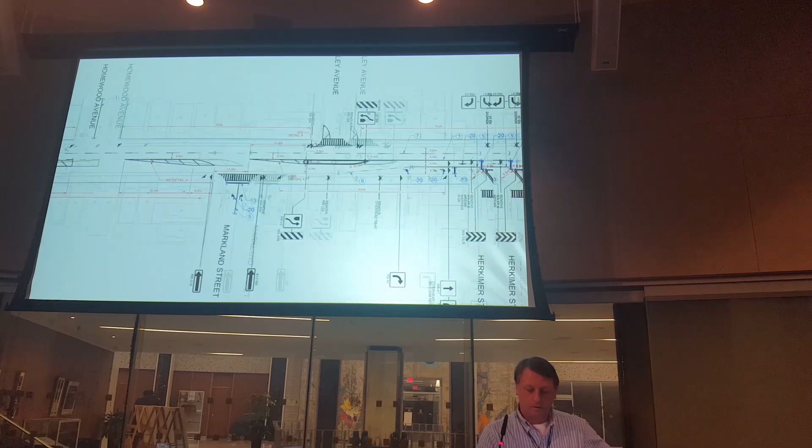Okay. And I'm going to reiterate something that was said before. There's a distinct feeling that this two-way conversion is right now a road to nowhere. Because if we're subscribing to the idea that we're dealing with this because of all the left-hand turns, the traffic is trying to access the Kirkendall area.

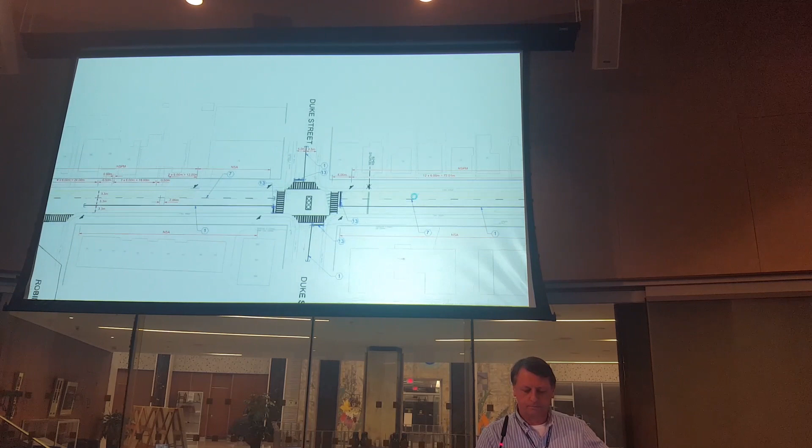There are only two streets now that you can turn left at beyond Aberdeen? And Jackson doesn't go through, it dead ends at Dundurn. So it's not a viable option, so now we're just sending all the traffic down Hunter, which again doesn't. Yeah, I think we looked at Charlton, Hunter, and Jackson. Charlton, Hunter, and Jackson. But Hunter and Jackson aren't really useful because they don't go through. They go through as far as Locke, and then we just move the problem from Queen to Locke.

So I think it would be a lot better if we went all the way to King with the two-way. And I know that the council said, yeah, we're going to Main, but what's the point if we're not going to King?

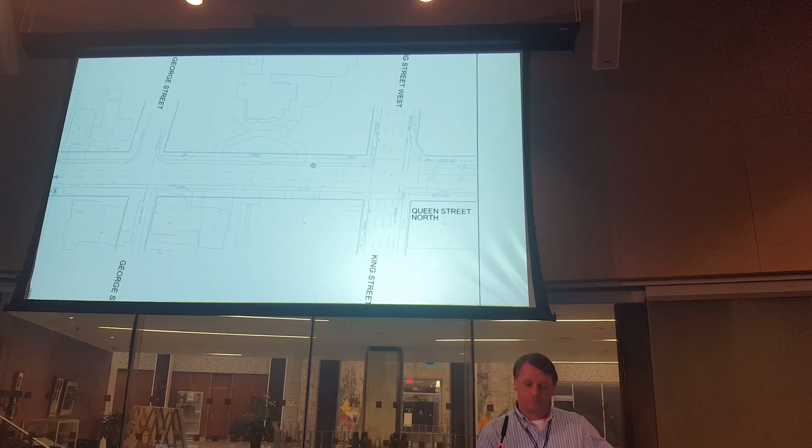Thank you very much. I just want to assure you that discussions are underway with the LRT office to try and really test for that feasibility. So it certainly would be my desire. I think it was flagged in all the previous reports, but given the unknown with respect to how that corner is going to be configured with LRT, they just couldn't commit to it. So certainly I understand.

The vehicles going by, and I can always tell it's spring because motorcycles start at about Charlton, revving up to go up the hill. So yes, I'm very aware, but I still have to say, maybe some people who live east on Aberdeen might disagree, but I drive more slowly now, and I've been checking lately that I'm going about 40. It has calmed it down.

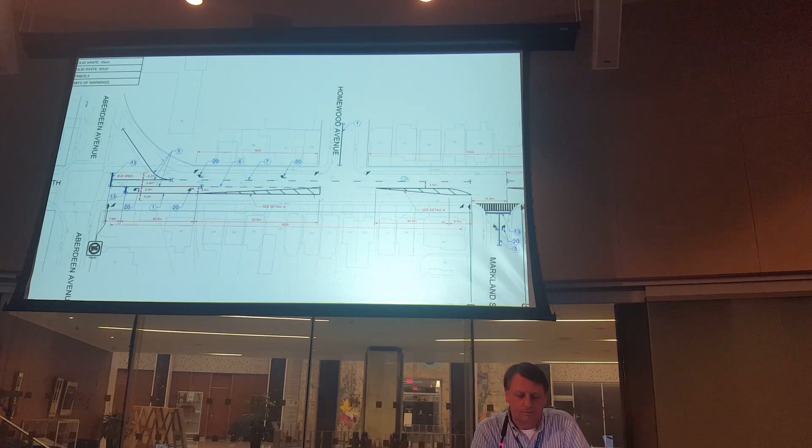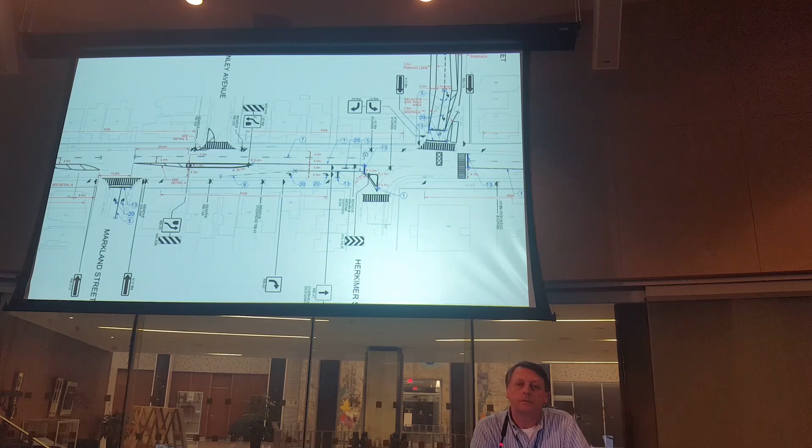Last summer, I was walking back along Queen, southbound, and I was at Robinson maybe, and stood there explaining to someone. It was absolutely frightening, the speeds. So if this would slow things down, yes, we need traffic flow, but it is a raceway, and it's frightening. And as I say, I've walked and driven Main Street so much, longer than I used to live south of Aberdeen and Queen as well. If this is going to have things moved, be pedestrian friendly, I'm for it.

And speaking of people going the wrong way, you'd be surprised how often I turn out of my driveway, and I'll get back to that in a minute, and I'm about to go eastbound and straight ahead on Aberdeen, and cars are coming this way. It happens there too.

I have a question. You may not be able to answer this. You said that there's more to be done at Queen and Aberdeen. Do you know what that is? Did I say that? No, I said that. Maybe I pretended you did. Yeah, no, we basically have done what we've planned to do with Queen and Aberdeen. There was a request to go to a stop sign here, it's a yield sign.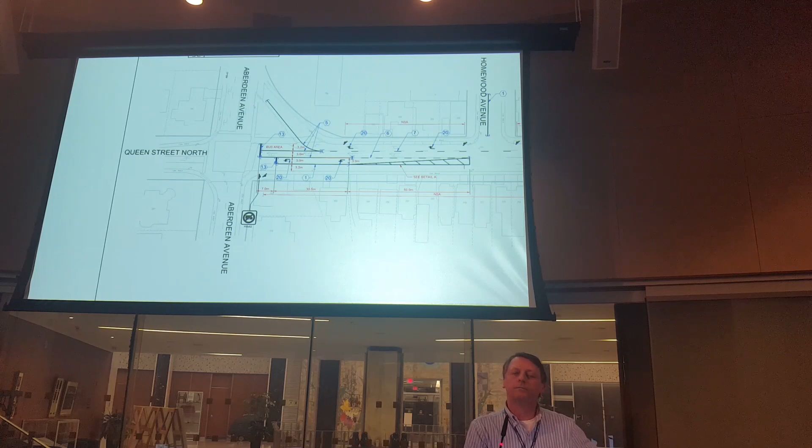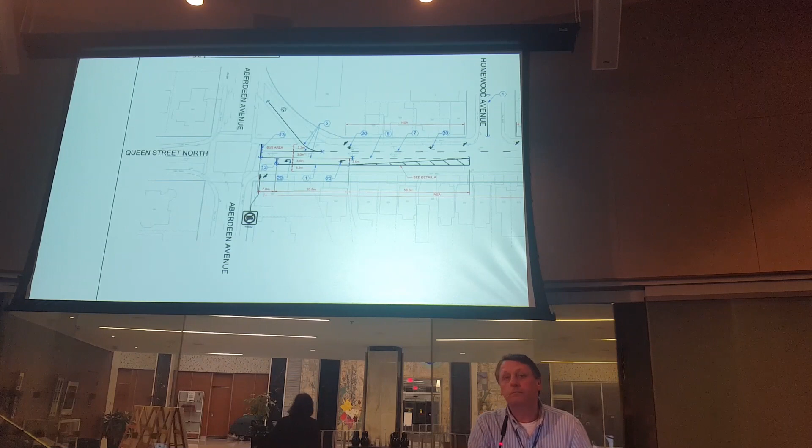Some years ago, I asked the traffic department about a sign to slow people down on that curve, because it's frightening. To be honest, there hadn't been enough accidents. And in truth, in all the almost 35 years, 95% of the time, I can make a left turn out of my driveway eastbound onto Aberdeen. I think it's the way the lights are configured. It won't slow things down.

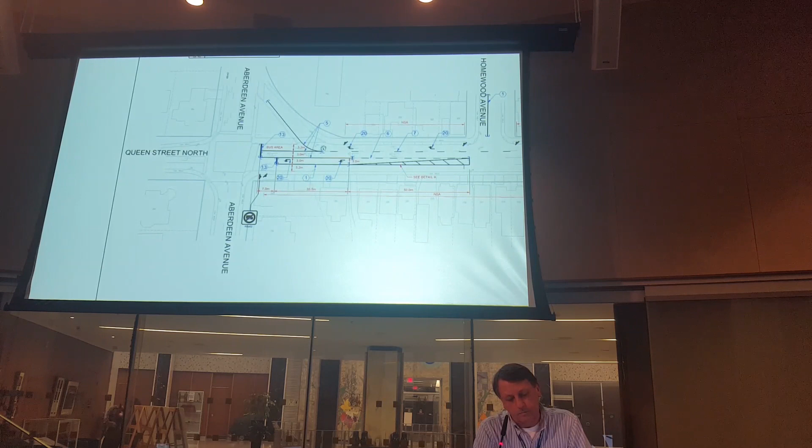I just wanted to talk there about the speed, ask about Aberdeen, and to say I appreciate the work being done, and I'm going to look forward to hearing the updates. Thank you.

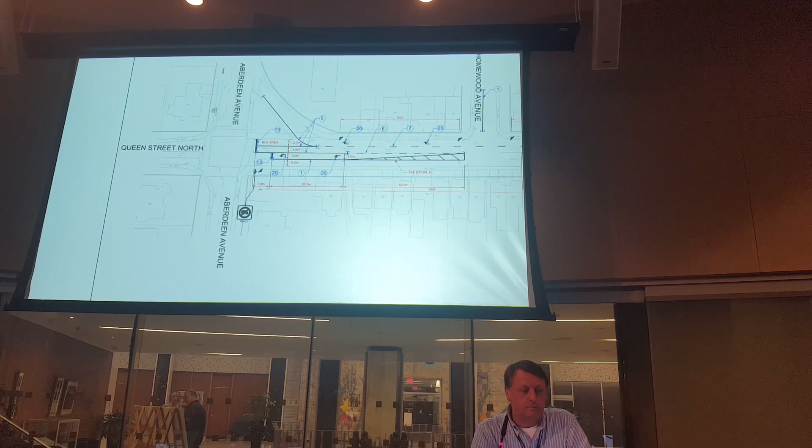About the speed, but I haven't heard really anyone respond in regards to what is being done to enforce the speed, because obviously we want to direct the traffic down Queen Street. That's understandable. So there's probably a chance that there will be more traffic, more than 13,000 right now a day. Yes, what do we do about controlling speed? What do we do about enforcing it? Because signs are wonderful, but without having the police presence, which we've mentioned, we never see police presence on our street. So let's be able to know a little more about it.

I'll speak to that and maybe David, you want to add? So just in terms of jurisdiction, the police services in Hamilton are not directly overseen by council. There's a Hamilton Police Service Board, which is comprised of provincially appointed members, council appointed members, and members of council. So there's no direct line for us to pick up the phone and say, thou shalt do that. And there are good reasons for that. In terms of enforcement, absolutely. Enforcement is a key ingredient to making our streets safe.

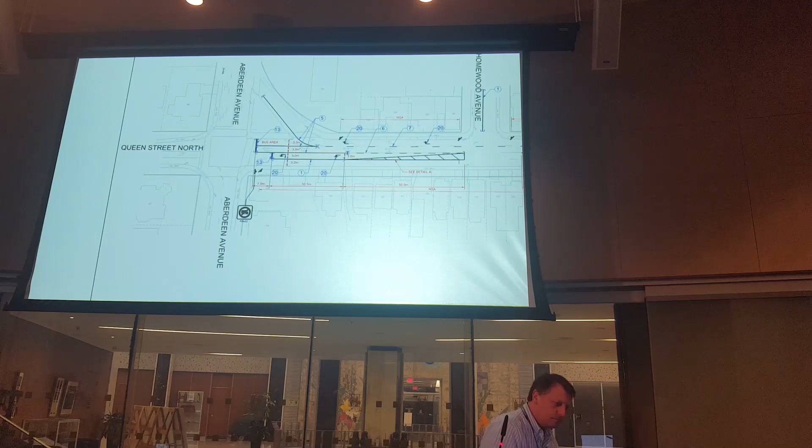I know Mr. Ferguson has just provided a report this past week called Vision Zero. And one of the key elements of Vision Zero is that enforcement component. So having the police working in partnership with the city on enforcement is critical, just appreciating that jurisdictional divide. And I know there's certainly a commitment on behalf of the city to have the police work in close collaboration as we move forward on those Vision Zero plans.

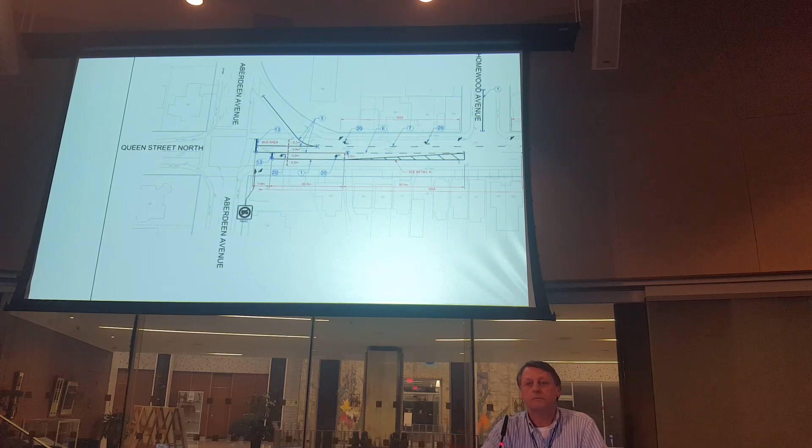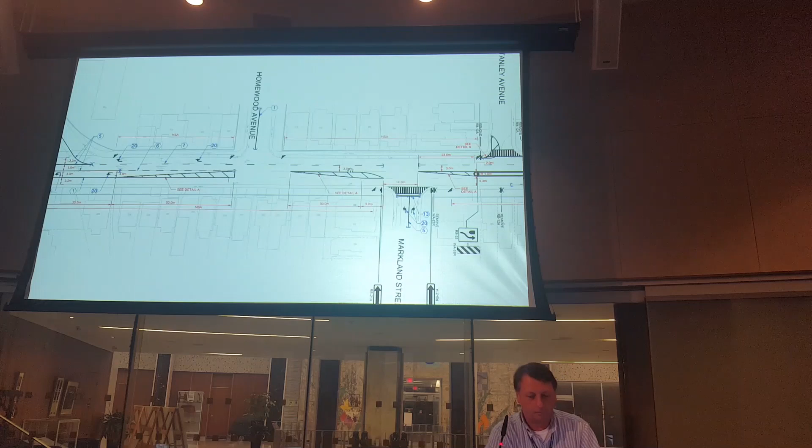I have a concern with adaptability. Whether it's a one-way street or a two-way street, I just have a concern, from observing other projects in the city, that sometimes measures are taken and then it's costly when we decide to do something else with it. And suddenly that bump out or that lane restriction is in the way and we're rushing to remove it. So whatever measures you take on this final design, allow the adaptability. So if in 10 years' time people decide to go in a different direction, it's not going to be costly to change it over or adapt it to something else.

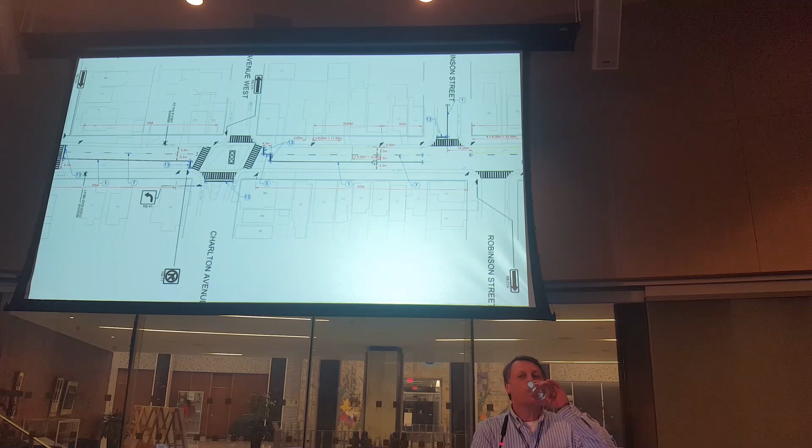The other concern is because restrictions exist on movement of large trucks and the fact that it is one of the few accesses to the mountain, anytime there's a major accident on the 403 or Red Hill, etc., we observe the amount of traffic exponentially increases on Queen Street. So whether it's one way or two way, there's not going to be any ability for an ambulance to get through to that hospital.

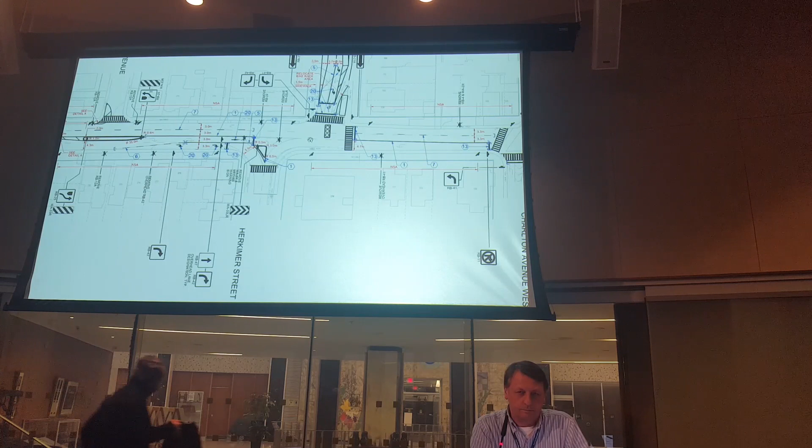So is there any consideration to allow that lane? I see that you've got the ability perhaps to have a lane that changes over, depending on the time of day, from northbound to southbound. Is there an ability to have all three lanes going southbound between noon and 6, or the reverse?

Yeah, the only problem, and we kind of joke about that now, is when you have all 3 lanes going the same direction. What type of signs do we put up to tell drivers not familiar with the area, oh, you can't go through here because there's gonna be 3 lanes of traffic coming at you? It's awkward when certain times of the day you can all flow one way, and other times of the day you can't. It is done in some cities, but it's very unusual.

It's really about trying to convey that message to drivers, especially if there's no cars coming, because all the lines you have on the road would be white skip lines, so they wouldn't know, am I driving the right way? But, well, in this instance, is it actually more directed about emergency circumstances?

Well, I can't really speak for ambulance drivers and emergency vehicles, but I mean, they can ride on the wrong side of the road, they can go the wrong way on a one-way street, they've got a lot of power to do things that the rest of us can't do. If they gotta get somewhere, they gotta get there.

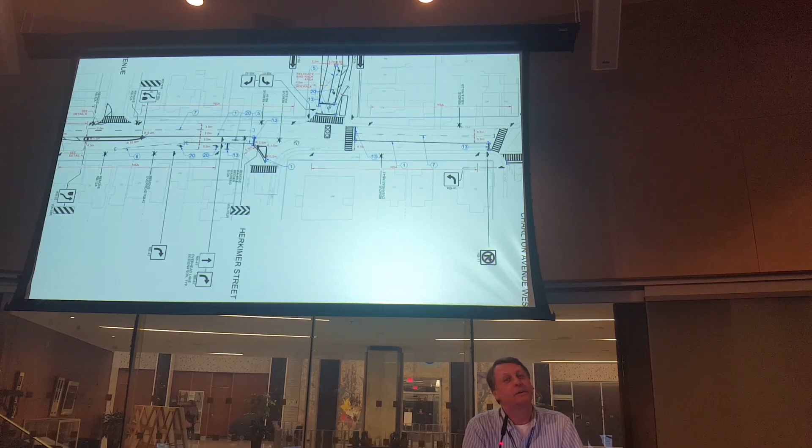But as far as the 403, yes, every September we watch, and we start seeing all the congestion on the 403. All summer long, it's nice and quiet. As soon as Labor Day rolls around, you start getting that congestion on 403, everybody's going back to work again. And then by about mid-October, it seems to calm down.

Hi, I usually like to bark from the peanut gallery rather than get in front of a mic, but I've lived in the neighborhood for about 50 years and a little more. I have 3 kids that go to one of the 2 primary schools between Queen and Dundurn. And I can speak for my community: honestly, if there isn't 100% agreement to this, it's 99. Everyone I know in my neighborhood has been waiting for this, and they're going to be applauding your efforts, and we congratulate this.

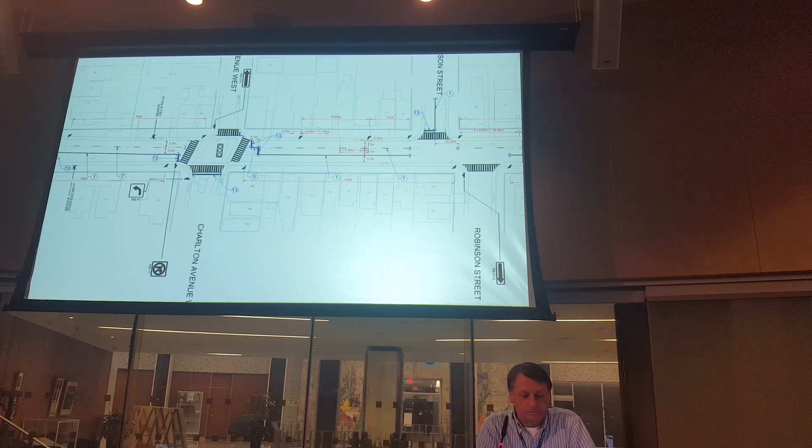So anyone living south of Aberdeen or east of Queen, if they're bringing their kids to school, has to venture on the Aberdeen Raceway, as we affectionately call the street, and risk their lives getting to school in the morning. 2 primary schools, that's JK. So I just want to say thank you for all of this. It's been a long time coming.

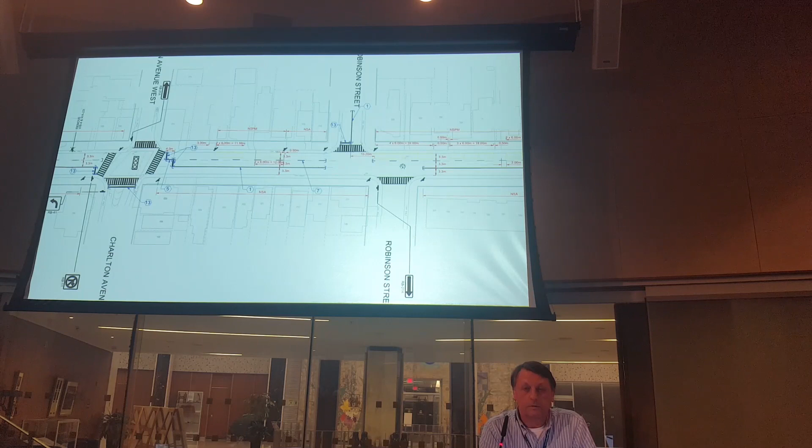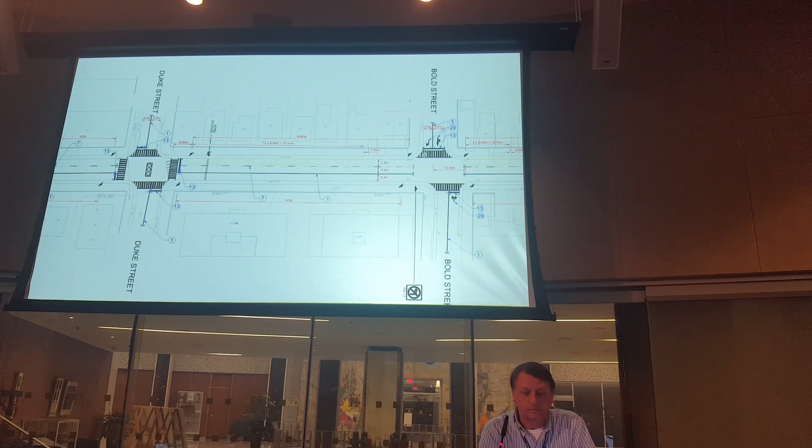It's an emotional issue for that neighborhood because they have little children walking on Aberdeen in the morning. And we look forward to hopefully the next phase being emptying the Queen northbound onto King Street. I know the LRT is going to be there. Or adding a westbound lane on Main Street. Hopefully that's the second phase. So thank you for your efforts.